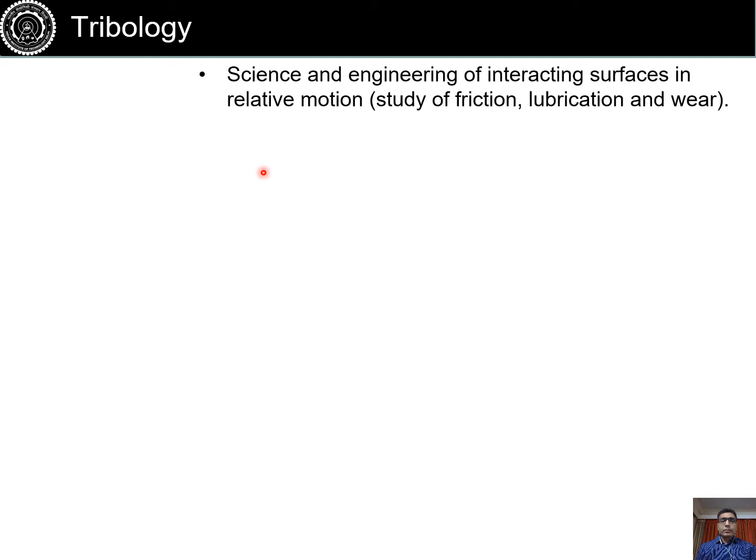Providing lubrication, it can be solid based lubrication or liquid based lubrication, and it's a very important field, and also it spans across all length scales, ranging from understanding natural phenomena such as earthquakes, where friction between tectonic plates gives rise to earthquakes, and engineering machineries.

Automotive engines, hard disks - they all have severe tribological problems which lead to failures, and also it results in energy loss, as well as reliability of the components are affected due to these tribological issues.

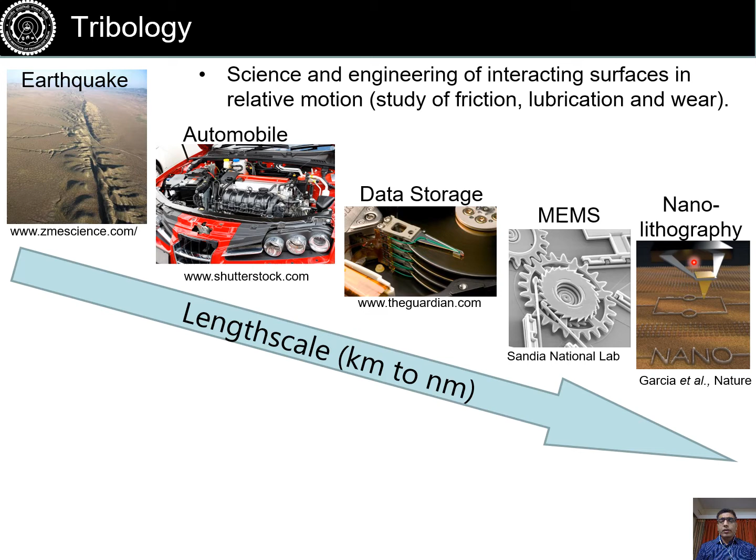Tribology is also going to be important for futuristic devices such as MEMS or nanoscale applications where sliding or interacting surfaces are involved. So it is very important to address and understand the fundamentals of friction, wear, and lubrication in order to improve the safety, efficiency, and reliability of these engineering components.

And in terms of economic losses, if you sum up the total losses every year due to tribological problems, it is quite a significant amount of GDP of any industrialized country, which is lost every year.

And the primary reason why we are not able to minimize these losses further is due to a severe lack of understanding in terms of fundamentals of friction, wear, and lubrication.

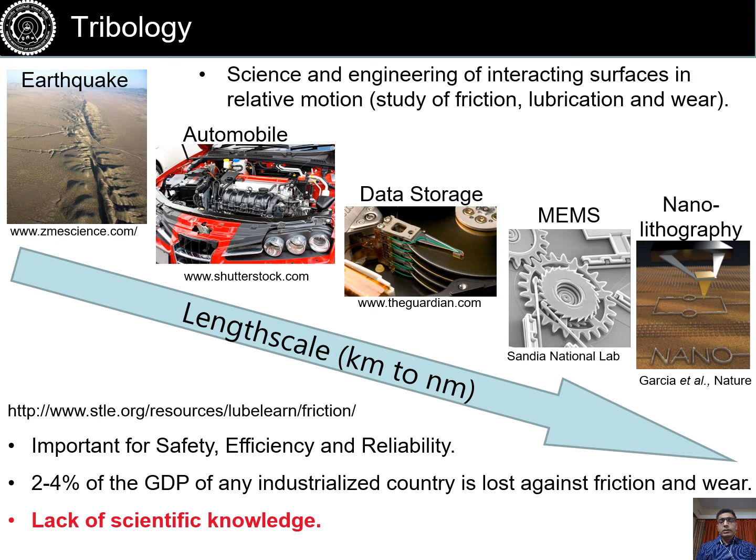So what makes friction, wear, and lubrication hard to understand fundamentally is the complexity of the sliding interface. If you consider two interacting surfaces, the interface where these surfaces touch each other is extremely complex. The surfaces are rough and they have a large number of asperities, and these asperities are of different sizes and shapes.

And when these asperities touch each other, then these surfaces experience friction and wear, and that's where we have to minimize these friction and wear related losses.

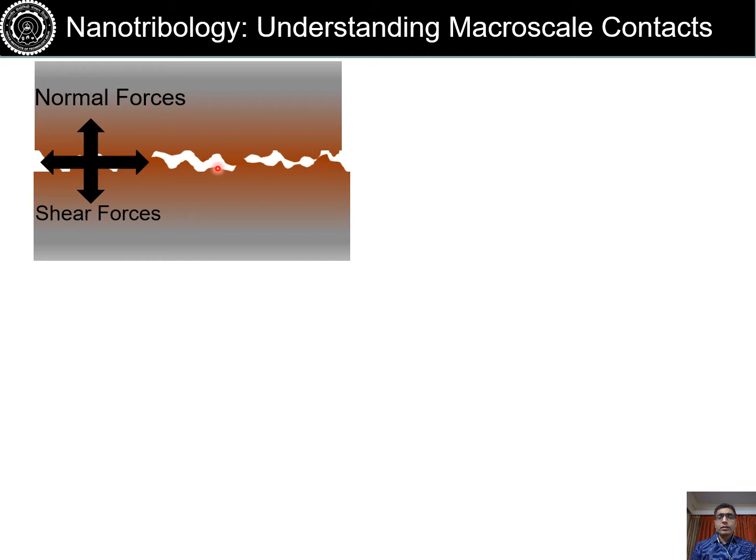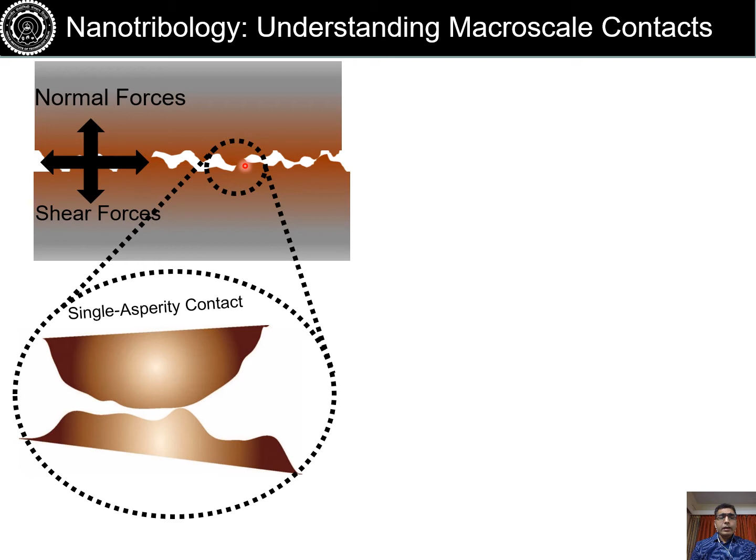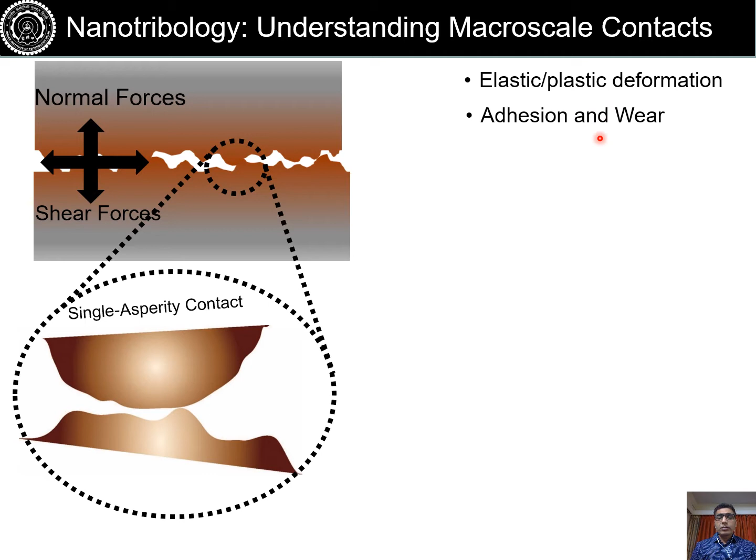And these processes happen because these asperities are directly in contact with each other. And in addition to that, apart from deformation of these asperities, there could be adhesion between these asperities, there could be material wear when shearing happens.

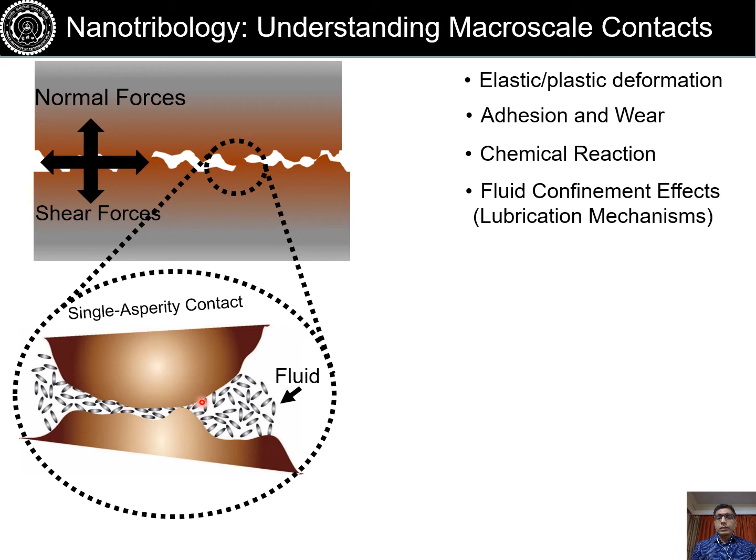And also there could be chemical reactions, particularly in presence of reactive environment, or these surfaces can also bond to each other or weld to each other if they are reactive.

So the question is, how to really understand the fundamentals of these interactions? We need a technique which allows us to look at these asperity level interactions.

And AFM is one such tool which has the potential to address this, because it provides us a very well defined contact where you have a single asperity contacting against a variety of materials which can be studied in this technique.

In a variety of environments, you can use all sorts of lubricants, for example, and these lubricants can have different chemistry, and you can study these sliding interactions under those conditions, and also you can have control over temperature as well.

So the idea of using this technique is to go from an empirical macro scale approach all the way to understanding asperity level interaction, which is the fundamental of these macro scale interactions - the crux lies in the asperity level interactions.

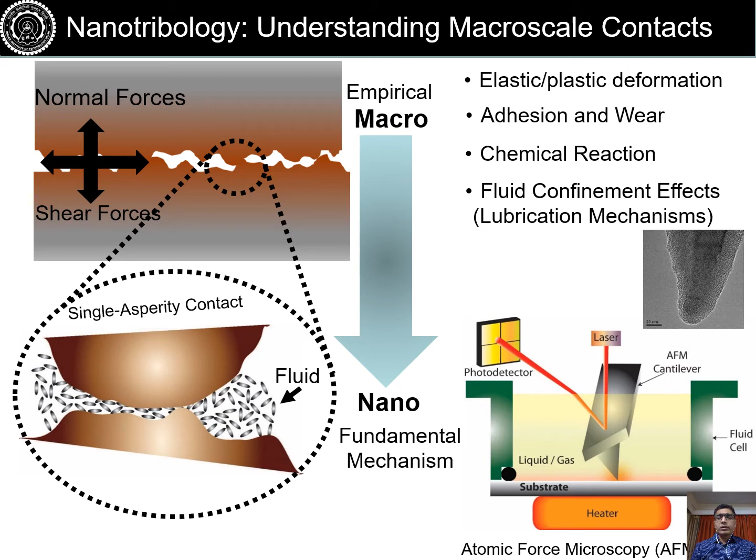So one question we try to address using this technique is studying a lubricant which has an additive used for car engines. Automotive engine oils contain this ZDDP molecule, and this molecule has been studied for decades, but it's not fully understood how it works, how it reduces wear between the sliding components.

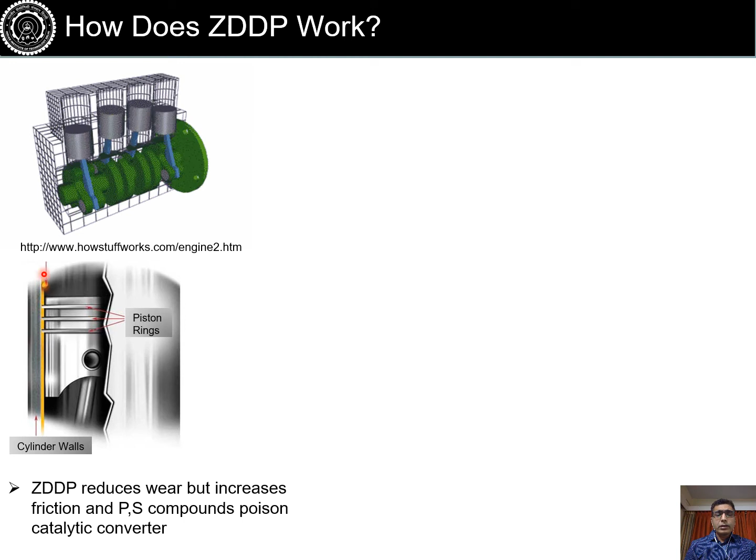It is well understood that when this molecule is added to the lubricant, it goes to the sliding interface with the lubricant, and that results in reaction of this molecule at the interface. What has been observed is that at the sliding interface, a tightly bound layer is seen, which protects the surfaces. So it acts as a protective layer.

What has been hypothesized is that due to high contact pressure at these small sharp asperities touching each other, at elevated temperatures, and due to shear, some kind of reaction happens in presence of these molecules which results in these films. But there's no direct evidence of how these films grow and what parameters govern the growth of these films, because of the complexity of these macro scale interfaces, which has been very difficult to interpret in terms of understanding the local interactions.

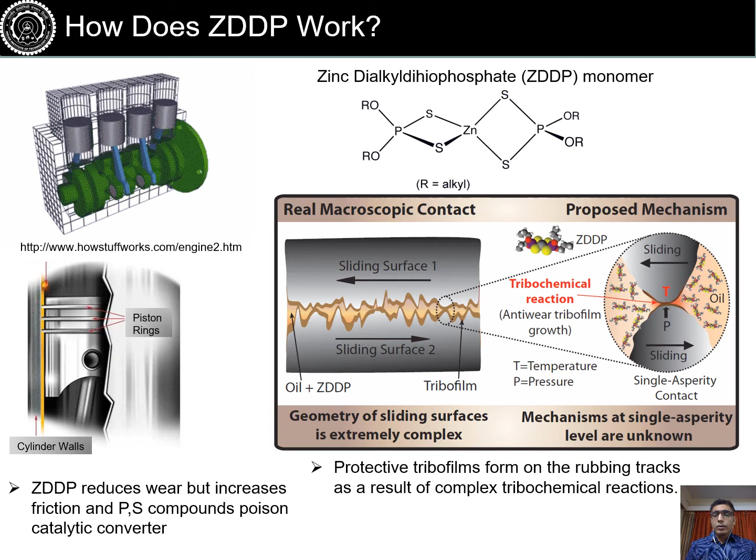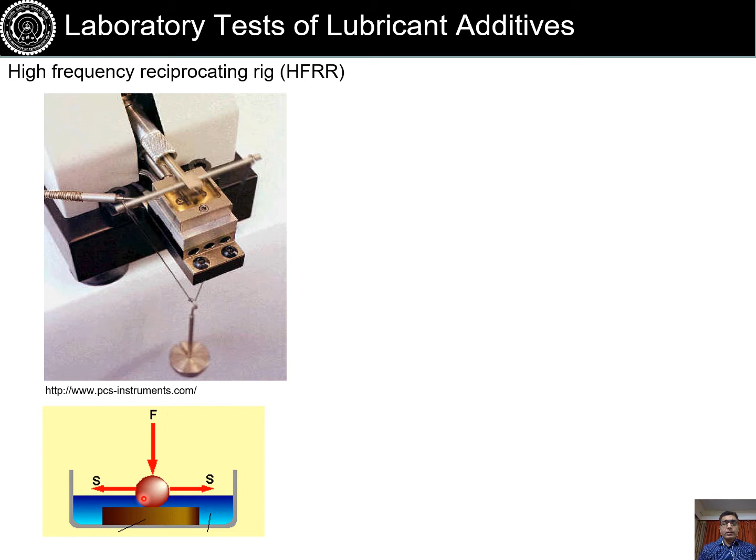So what typically people do to look at these lubricants' interaction with metal surfaces is use tribometer tests, where they can use a metallic ball against a metallic surface. What they have observed is that whenever ZDDP is added to the lubricant, a film starts to develop in presence of ZDDP. As time progresses, this film becomes more dense and thicker, and that results in anti-wear properties, because now metal-metal contact is prevented due to formation of this protective layer.

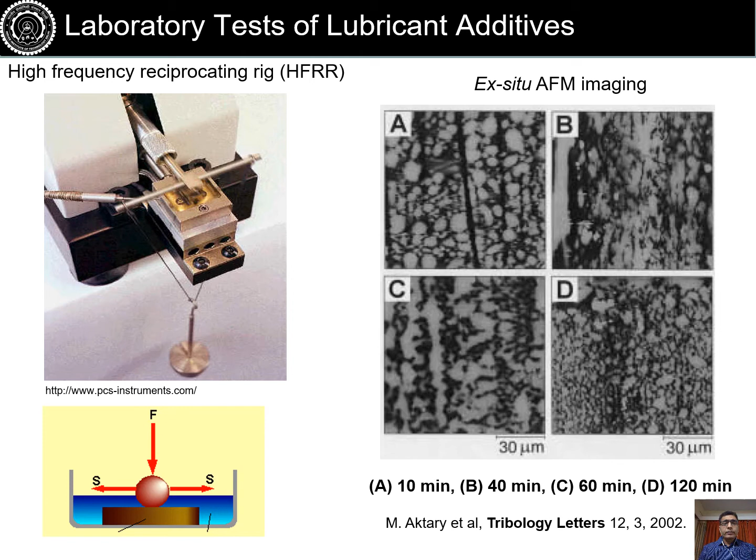But so far there was no evidence of how these films form, exactly what parameters are important for the growth of this film. So we took up this approach based on AFM in liquids, and we conducted an in situ experiment.

As I've shown this picture earlier, we have an AFM based setup which has a fluid cell where we can use a lubricant and ZDDP in 1 weight percent standard concentration, which has been used in macroscale experiments. We can use a steel substrate or iron coated silicon surface, which was initially used in our experiments, but later on we moved on to steel as well.

We used a silicon cantilever which is coated with diamond-like carbon to provide high wear resistance to the sharp tip, otherwise it will wear very quickly under high contact pressures. Then we did experiments at a variety of forces, variety of temperatures, to look at what happens in this kind of environment. So here is the schematic of the experiment.

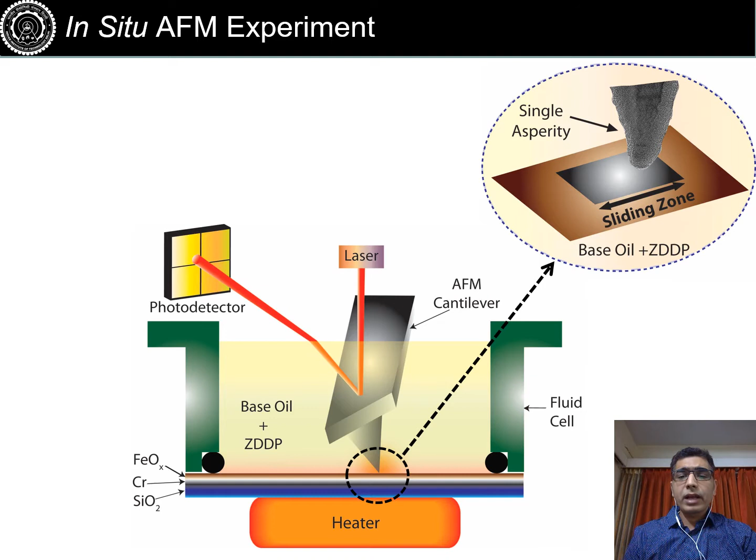So we select a very small region of interest on the sample surface, and we slide the tip at different loads, which will vary the contact pressure between the tip and the sample. Then we do these experiments with different temperatures at different length scales in terms of sliding time, and monitor what happens to the surface.

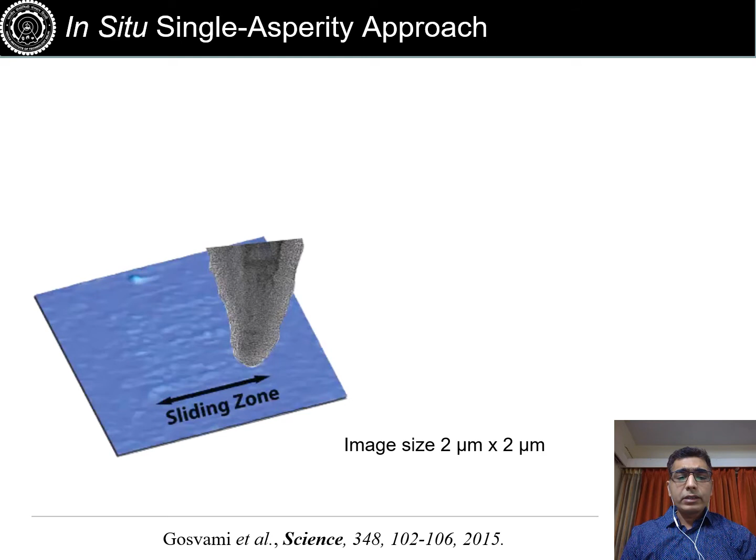And we were successful in conducting an experiment where we found out a condition where at certain critical pressure we saw that when sliding happens above certain critical values, the film starts to develop.

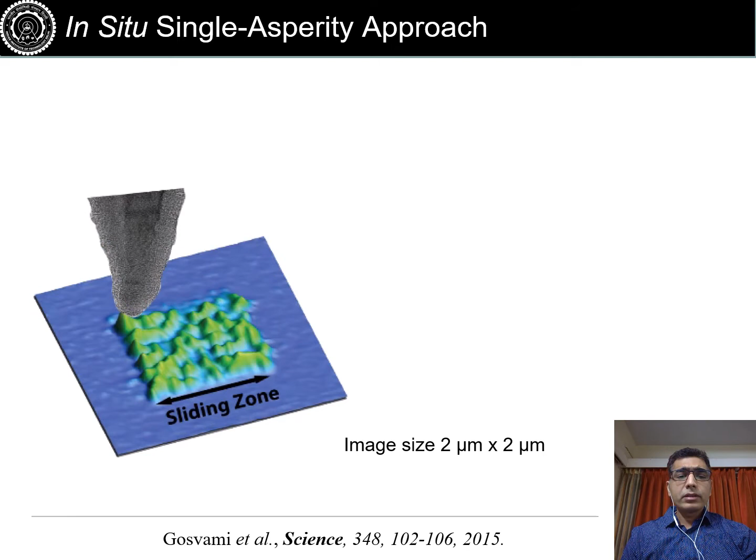And then we image this film by applying low pressure and take a larger area image so that we don't form the film outside this region of interest. As you can see, we have stitched several images together to show you how the film growth is progressing with sliding time, only in the region where high contact pressure was applied.

So it's a highly controlled experiment performed at a very localized region of the sample, and we first time very clearly showed that this film develops only in a region where pressure above certain critical value was applied.

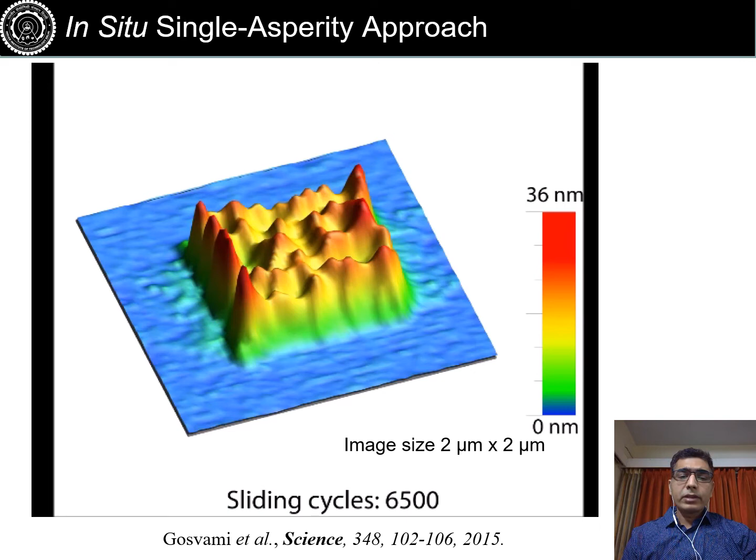Then we did a very systematic study as a function of contact force, which will vary the contact pressure. In terms of increasing pressure, we saw that film growth for a given sliding time is thicker for higher contact pressure. So as the pressure is increasing, film thickness is also increasing for a fixed sliding time. And of course you start to see wear or deformation of the film when the pressure becomes too large.

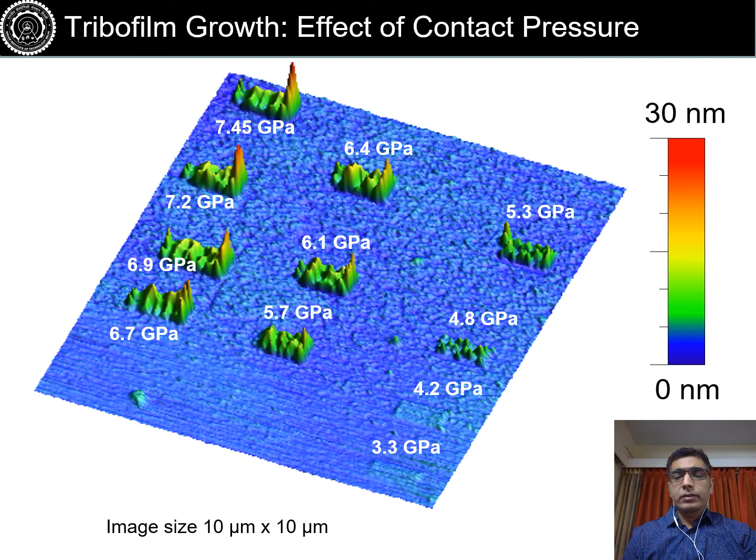So in order to understand how this pressure is affecting the reaction, and another parameter is the temperature, we saw that this reaction did not happen at room temperature. So how to take into account these parameters? We try to analyze it in terms of a simple chemical reaction.

It's a single barrier Arrhenius type reaction rate theory. So we assume that the growth rate of the film is exponentially dependent on temperature based on this Arrhenius reaction rate theory.

But we saw clear evidence of stress applied at the tip-sample contact, so we have to take into account stress or contact pressure as well. The idea behind how we can incorporate stress in this equation is by assuming that the energy barrier is reduced as stress increases, which is evident in our experiment when we increase contact pressure and see the reaction happening at a faster rate. So this is a very simple model we used where we took into account the stress multiplied by activation volume,

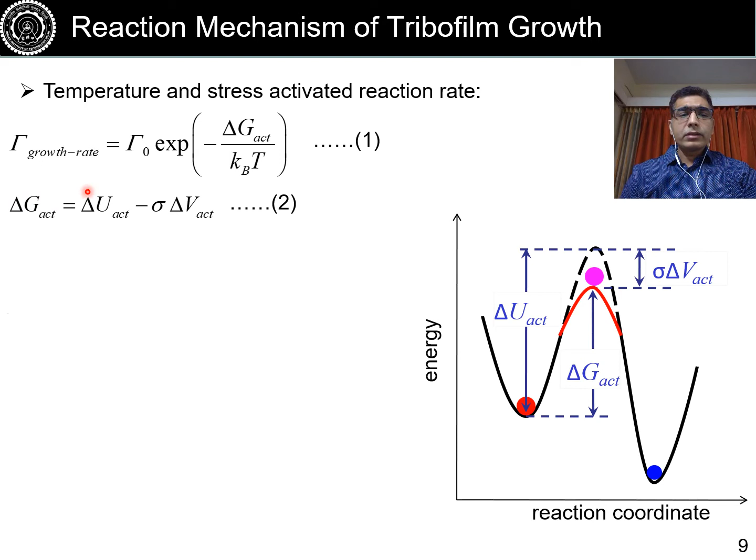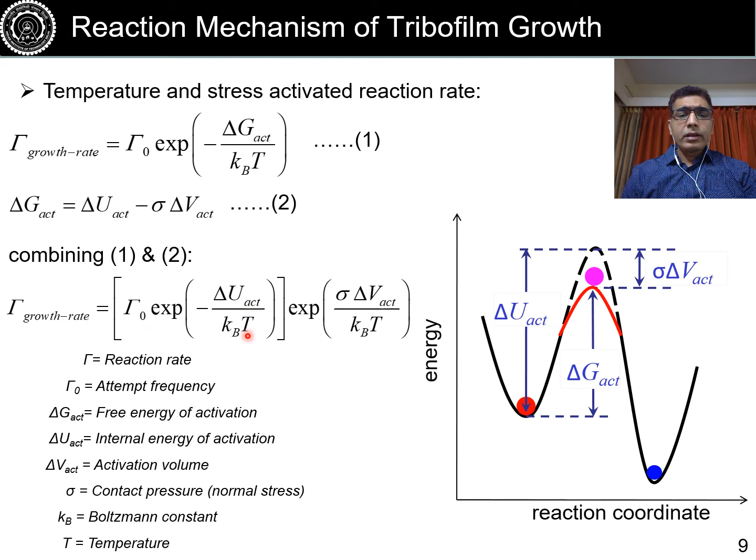which is the reduction in energy barrier due to application of stress. So we modify this equation by taking into account the stress or contact pressure multiplied by activation volume, which will reduce the energy barrier. So this equation converts into a final equation where we have temperature as well as stress taken into account.

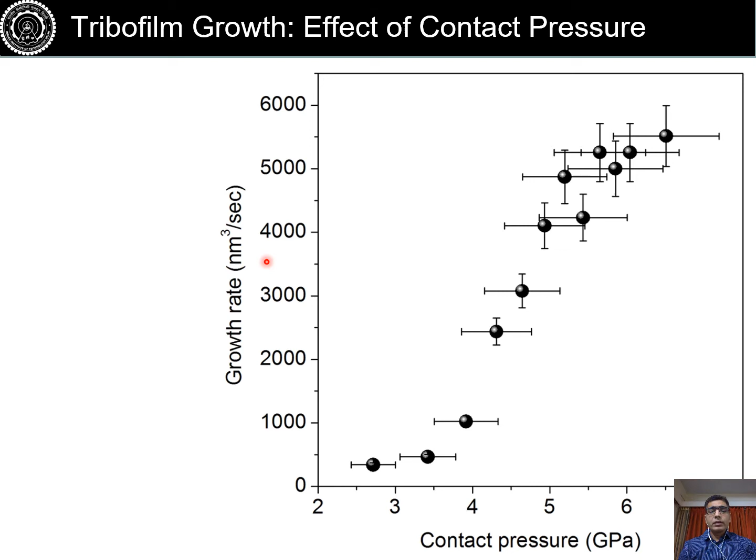So then we did a systematic study where we varied the contact pressure and looked at the growth rate of the film in terms of volume of film growth observed per unit time. And we see a very nice fit to the data up to a certain value of stress.

So we see that at very low stress or contact pressure values, the growth rate is very small, and it exponentially increases with increase in contact pressure.

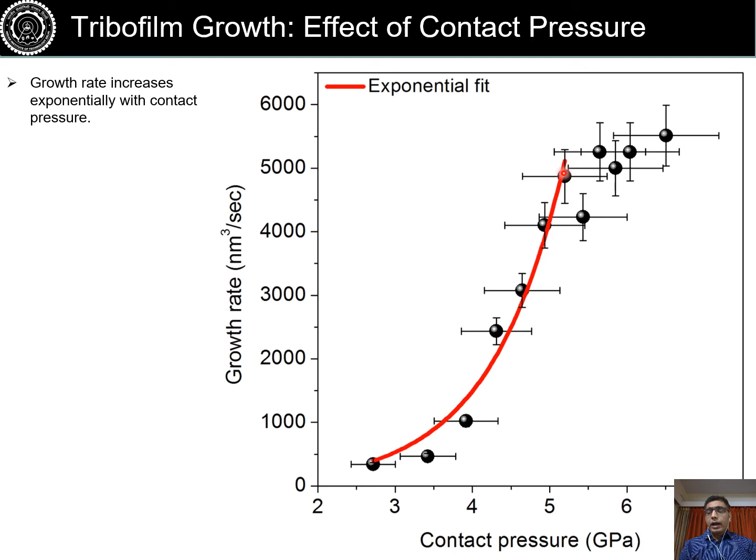But what happens beyond this point is that this model doesn't fit, and the reason for that was clear to us when we looked at the AFM images of these films. We saw that in the region where the data fits well to this equation, the film is not damaged or wearing away. So whatever reaction is happening, the film is building up, getting thicker and thicker.

But after that, the film thickness became almost constant, or the growth rate saturated. This is evident in the image -- if you look at this image at higher stress, you see the film has deformed quite significantly. You can see some kind of shearing of the film has happened. So significant wear of the film starts and then the growth rate saturates.

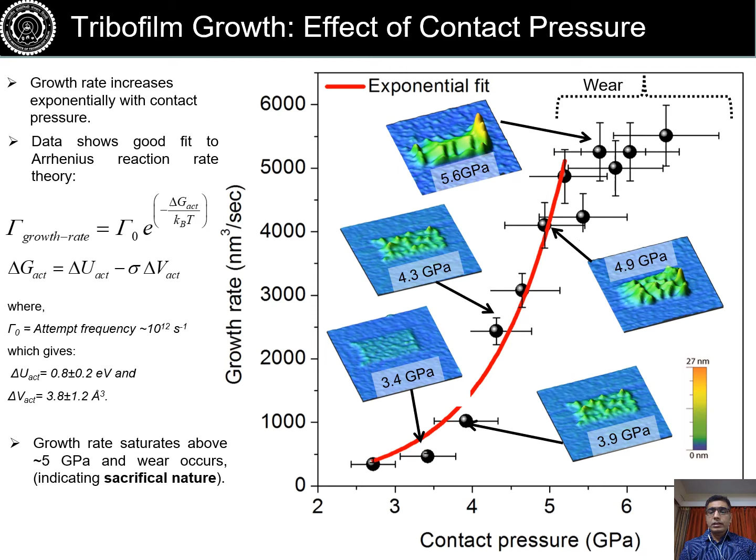So we managed to get some reasonable numbers from this. The activation volume came out to be of the order of atomic dimension size, and the energy barrier also indicates some kind of chemical bonding happening between this molecule and the substrate. So of course it's not telling us exactly what reaction is happening, but it's providing clear evidence that it's an activated reaction which is assisted by contact pressure or stress applied.

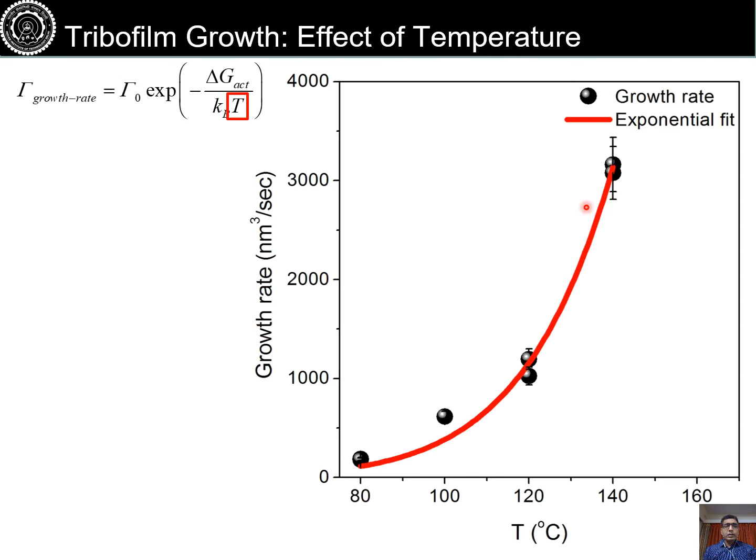So in order to further confirm this activated model, we did a separate experiment where we maintained the stress as constant and varied only the temperature. In that situation, we again got data which showed that the growth rate is increasing with temperature in an exponential manner, and the fit looks reasonably good. We got very similar values of energy barrier, which suggests that by doing independent stress variation and temperature variation experiments, we confirm that

it can be described as a chemical reaction which is driven by stress and temperature.

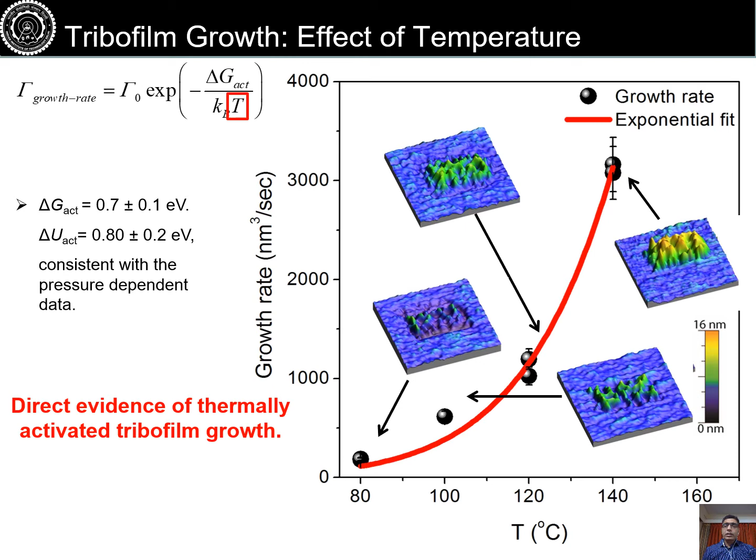So this was the first time the ZDDP molecule, which is actually an automotive lubricant additive, has been studied at this length scale, and that was possible because of the availability of tools such as an AFM which can work in those kinds of environments. So this was very encouraging and it opened up a lot of new avenues for us to look at molecules or lubricant additives which are relevant for macro scale tribological applications.

So we of course confirmed the formation of this film and showed that chemically this film is derived from ZDDP, because we have the elements which are present in this molecule -- phosphorus, sulfur and zinc -- and that confirms that this chemical reaction has happened in the region where sliding has taken place.

So of course, several questions were asked when we did this work: how is this relevant for multi-asperity contact where you have a more complex interface? Will it be identical in those situations, or how do we translate our results to higher length scales in terms of larger contact size? And also, our tip was diamond coated silicon, so how do we relate this to steel-on-steel contact, for example?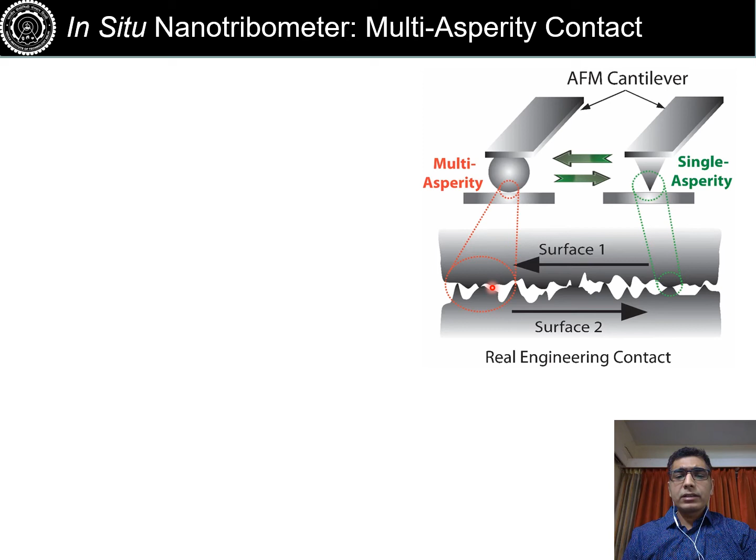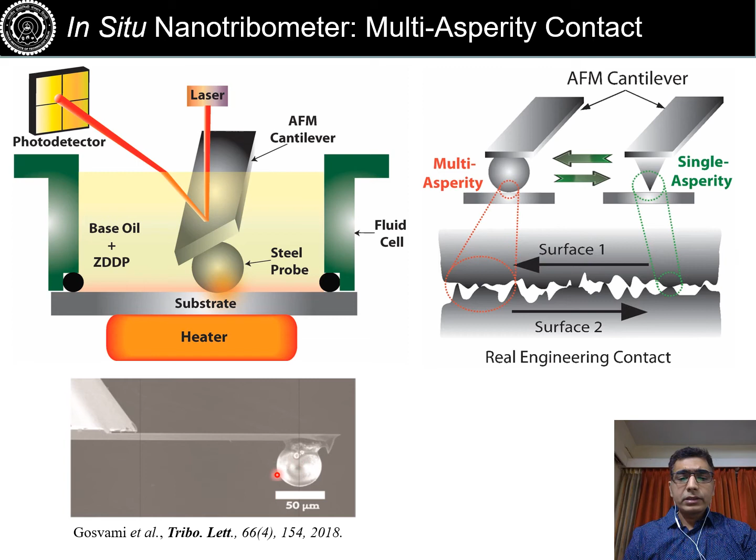So we generated some kind of microscopic multi-asperity contact to visualize how this reaction is going to change when you have such a difference in contact geometry. And we did an experiment on a steel substrate, so steel on steel in the same lubricant. This is an SEM image of one such steel microsphere attached cantilever.

So we found that when we did sliding, we could simultaneously record the image of the sliding interface, and this is a polished surface. You can see the polishing marks, and you can see that film is growing preferentially on the sharp scratch on the surface because of stress concentrations, and film is growing non-uniformly, forming island-like patchy topography, which we have seen previously in the single asperity experiment.

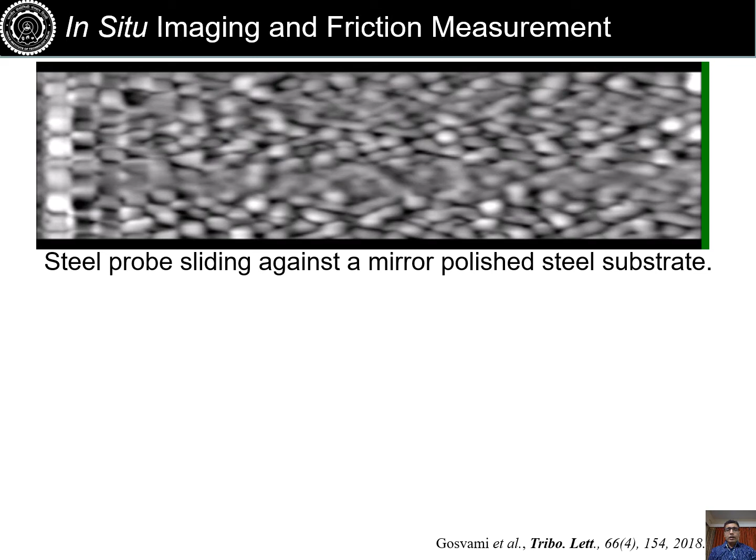And we found that, similar to the single asperity experiment, this film has formed only at elevated temperatures. One more advantage of using this microsphere against a flat surface was...

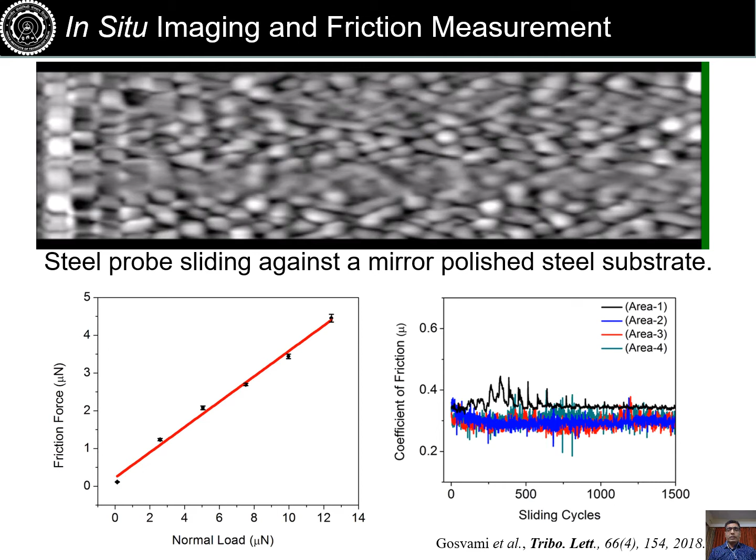So the major advantage is that you can also have a variety of probe materials which can be used in the form of microspheres attached to the commercial AFM cantilevers, and then you can study a variety of tribo pairs.

So we found that the film growth appeared to be very similar to what we have seen in single asperity contact. Film growth happens, and of course if we press harder, we see that film growth is faster, and also it happens particularly faster at elevated temperature.

So we could manage to do experiments in very controlled conditions with very controlled geometry, which allows us to understand in a better way how these molecules are reacting at the sliding interface. In a multi-phase system, it can become very important because you want to see how these local reactions are happening if you have heterogeneity on the surface and so on, which I will demonstrate as well.

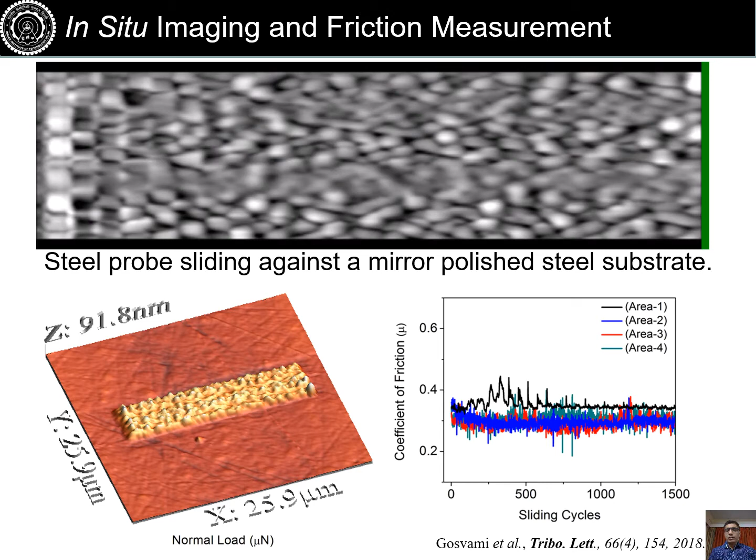So in terms of heterogeneity and looking at more realistic systems, we have started doing experiments on different alloys. One such example is aluminum silicon alloys, which is heavily used in automotive engine block manufacturing. This alloy primarily has two phases: aluminum matrix, which is the light color region, and silicon phase. Of course it has some iron-rich intermetallics as well, but those are not a significant fraction of the microstructure.

Majority is silicon phase, as well as the aluminum matrix, which is very soft aluminum region around hard silicon particles. So my student Prashant looked at interaction of ZDDP on these surfaces, and we looked at how these films develop on different regions of the surface, which has silicon and aluminum matrix.

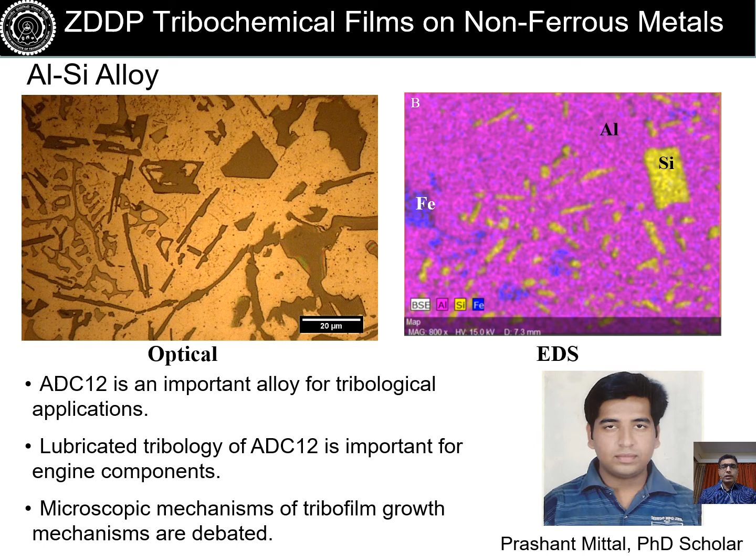So before I share the results, I will show what people have seen on these alloys in terms of formation of these films. It has been observed in macro scale experiments that mostly silicon phase is where the tribofilm develops, and ZDDP forms a nice thick protective layer on silicon phase, but the aluminum matrix doesn't seem to support these films. But the reason is not very clear because of the complexity of the macro scale sliding interface.

A lot of wear is generated in macro scale experiments, then there is a lot of mechanical mixing, so a lot of damage happens to the interface, which makes it hard to interpret the results. There's another set of results which shows a similar observation, that silicon is where tribofilms are developing, whereas there is no tribofilm on the aluminum matrix, which is the softer region around silicon.

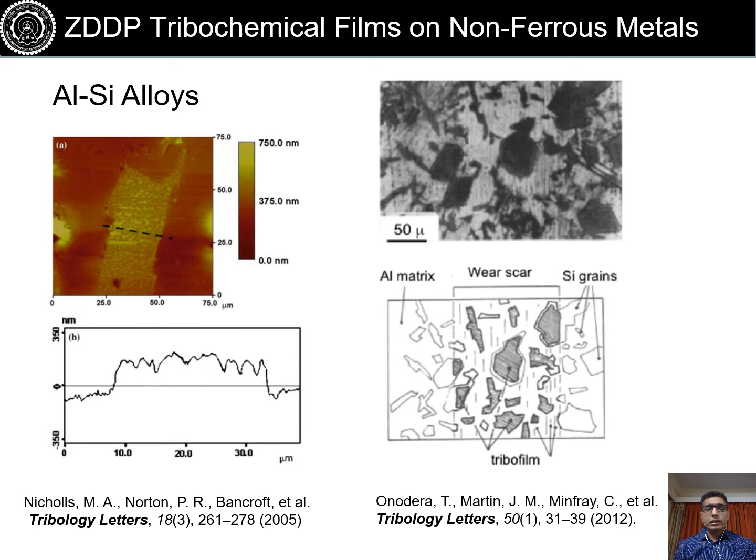So we did this experiment in a more controlled manner, where we selected a region of silicon and aluminum matrix around it and did a simultaneous sliding. When we do simultaneous sliding, we were actually puzzled to see a contradictory result, where we see tribofilm developing on both aluminum as well as silicon phase.

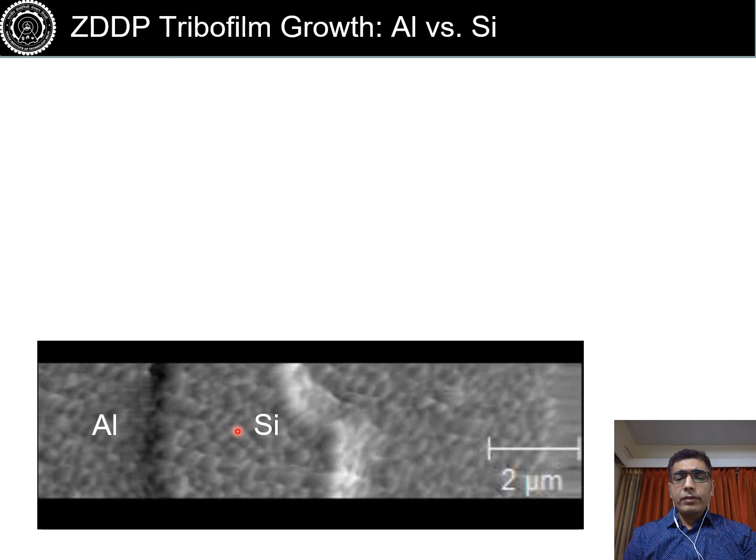Then we analyzed these tribofilms in more detail, and here is the final AFM image. So this is the silicon phase on which tribofilm has developed. You can see the islands of the tribofilm, and the aluminum matrix around it also has these films.

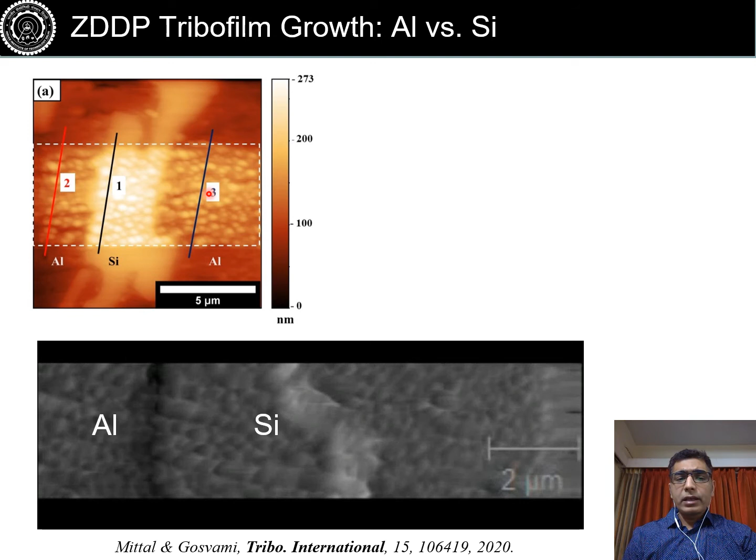But there was a clear difference when we look at the topography and height of these tribofilms. We saw that tribofilms were thicker on silicon, around 70 nanometers, with respect to aluminum, where they were around 40 to 50 nanometers. Also the roughness of the tribofilm on silicon phase is very different compared to aluminum, where you see more gap between the islands of the tribofilm, so it's more patchy compared to silicon, where there's a more dense film.

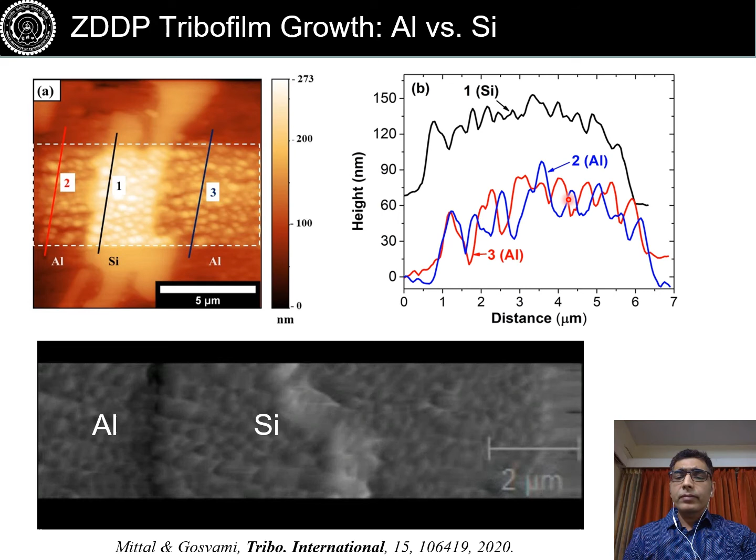We can relate this to the stresses because silicon is a much harder phase compared to aluminum. So the contact pressure for a given load at which we are sliding will be much higher on silicon. That results in a faster rate of reaction, which grows a thicker film.

We could also chemically characterize this film by looking at the elements present, and we see higher concentration of phosphorus and sulfur where the film is forming on silicon. Of course, it's a denser and thicker film, so that is expected.

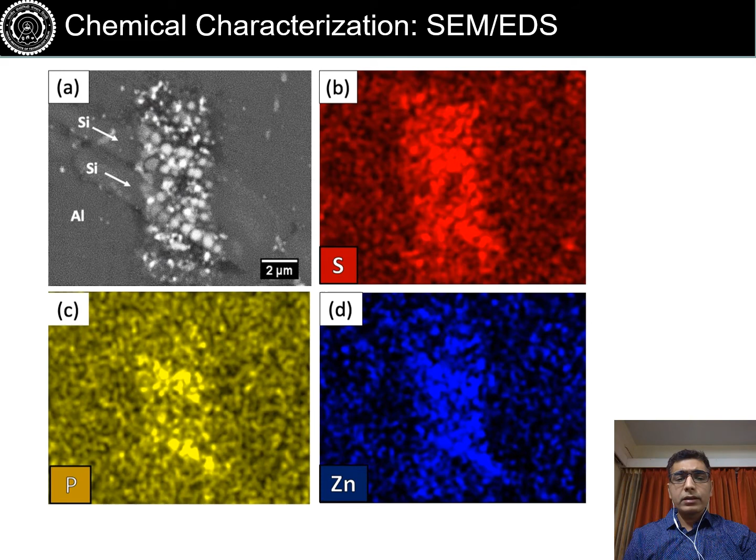Another interesting observation was when sliding far away from the silicon, purely in the aluminum matrix, we see that the film did not develop. We see continuous wear of aluminum instead. So we thought it could be due to silicon somehow affecting the mechanical property of the neighboring aluminum matrix with respect to a region away from the precipitate.

But we did nanoindentation and see that there's not much mechanical property variation in the aluminum matrix closer to the precipitate or away from it. So it has to do with something else, which can be related to small chemical changes in the substrate, but we have not yet fully resolved that, and we are still working on it.

We also see that friction coefficient can now be measured because we are using a microspherical probe, a ball-and-disc kind of tribometer setup, which we started using by attaching a microsphere to the AFM cantilever. These friction coefficients also correlate very well with our friction and wear observations.

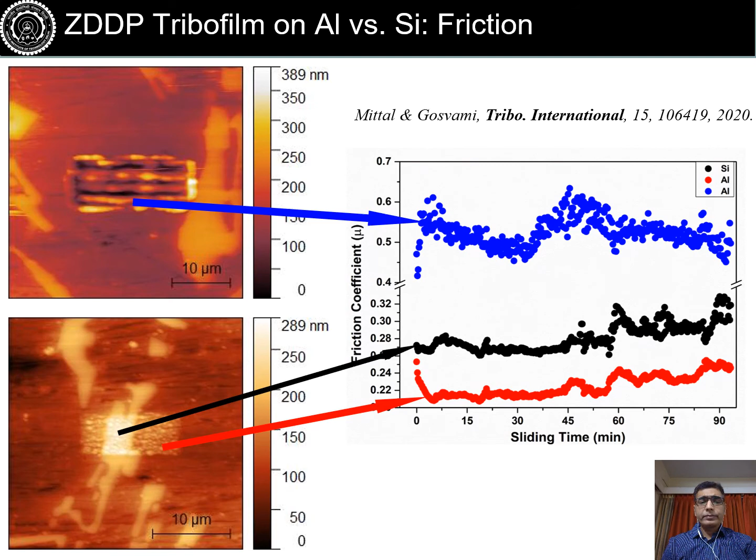Apart from aluminum alloys, we are also interested in magnesium alloys. My student Deepak has done some work on how these reactions happen on magnesium alloy surfaces, specifically AZ91 magnesium aluminum zinc alloy. In this alloy, we have either a cast version with large precipitates, or we can age-harden these alloys to improve their mechanical properties, but age hardening results in finer precipitates.

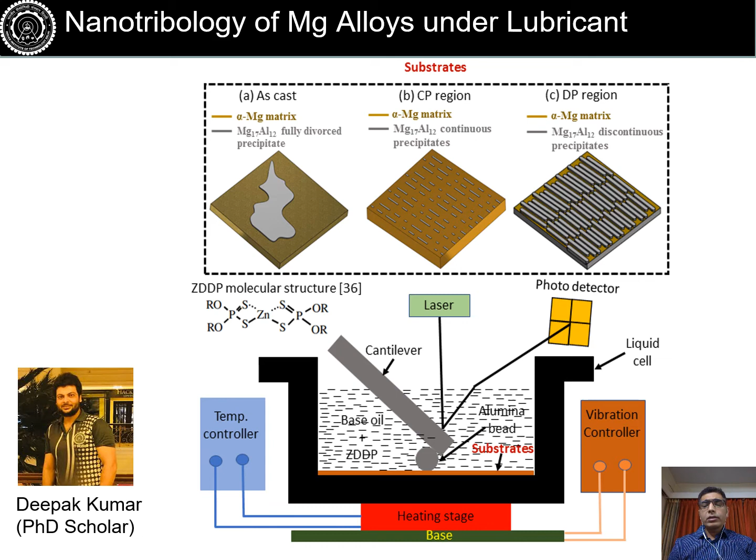How the microstructure affects film growth was investigated in this work, and we found that ZDDP forms a very nice tribofilm on large precipitates. This is a flat surface of a large precipitate, Mg17Al12, and around 40-50 nanometer thick film has been observed.

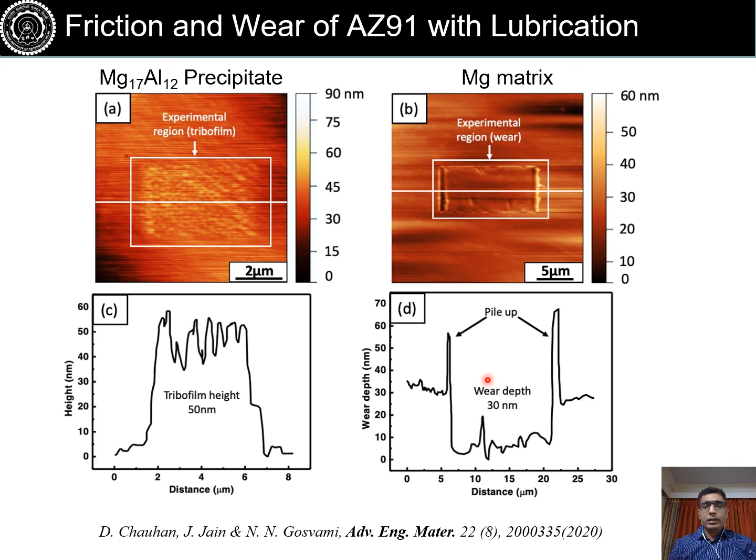Whereas magnesium does not support tribofilm formation, and we always see wear of the magnesium matrix. So ZDDP is a very poor anti-wear additive for magnesium alloys because we could never see ZDDP forming a film on magnesium, either close to the precipitate or away from it. We always see wear of the magnesium matrix.

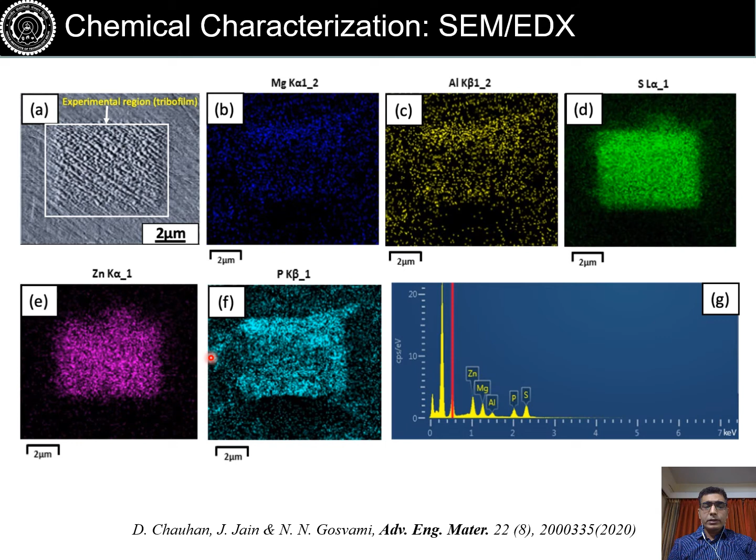On the precipitate, we characterized the film and confirmed that it comes from ZDDP-derived species due to the presence of zinc, phosphorus, and sulfur. Whereas on the matrix, we didn't see any such signals.

Then we conducted an experiment on the fine precipitate, which is the age-hardened alloy, and to our surprise, we could not see any film developed on this surface, where the wear is also very small. So despite wear not happening to that extent, the fine precipitates do not wear easily in an AFM sliding experiment.

Both types of fine precipitate did not show any tribofilm, and we believe the reason is the corrugation of the surface due to these precipitates. If you see, the surface is highly corrugated, and if the probe is sliding over such sharp features, there will be large stress variation and also stress concentration.

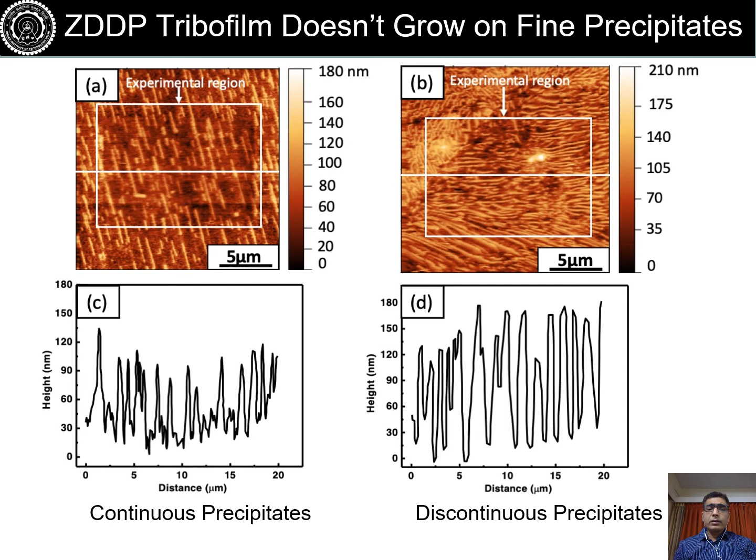We have seen in the previous first experiment where I showed wear of tribofilm at elevated stresses - that is probably what is happening here: these stress concentrations and stress variations are not allowing tribofilm to develop on the surface, and this corrugated surface prevents smooth or stable sliding of the probe, which is required for shear of these molecules so that they can react at the interface.

We also saw some interesting wear behavior of these fine precipitate containing regions. We tracked wear around a single precipitate, and we see that the precipitate does not wear as a function of load - we did sliding tests at different loads, continuously sliding and then changing the load and sliding again. So in multiple sliding experiments conducted in a single region, we see that the precipitate has not worn at all, whereas the matrix is continuously getting worn out as a function of time.

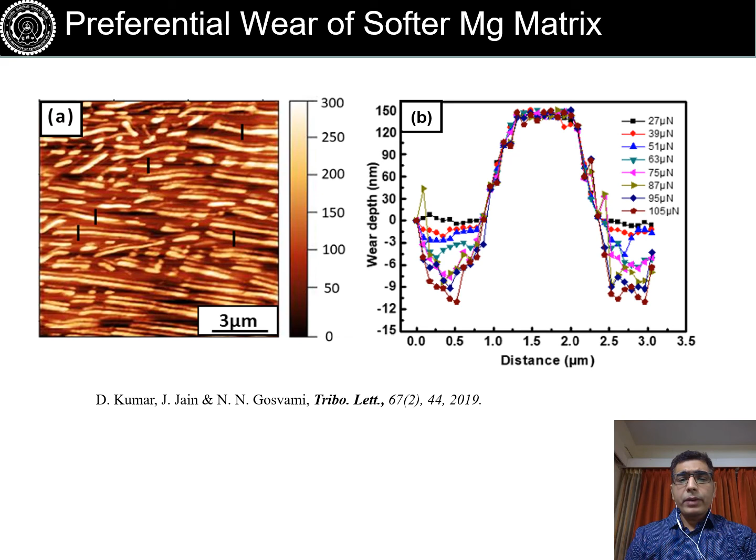So some wear is happening despite these precipitates not wearing at all, and this has a bearing on friction values. If you see the friction force data as a function of sliding time: in the fine precipitate regions, there is very gradual wear of the matrix around it, but pure matrix of magnesium wears completely, so friction is maximum there. On the large precipitate, where there's anti-wear film forming and no wear at all because there's no softer matrix that preferentially wears, we see the friction is very low.

ZDDP film growth as a function of time shows a very interesting feature on this large precipitate, where we see a quite strong dip in the friction, followed by, as the film thickens, friction increases and then levels off, and then there's some fluctuation, which we have not seen on ferrous substrate or aluminum substrate - it was unique to these magnesium alloys.

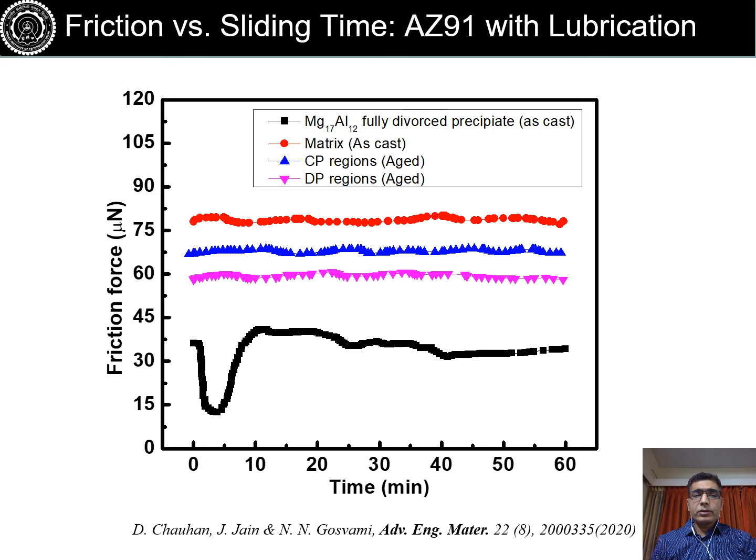Another study we conducted on magnesium alloy - since we found that ZDDP is not an effective anti-wear additive, we found in literature that macro scale studies have reported amide based molecules reacting well with magnesium and forming some kind of protective layer. But a detailed study at local microstructure or microscopic length scale had not been carried out.

So we took up this AFM based approach, and again looked at the purely magnesium matrix in an as-cast alloy. We can clearly see that a film has developed on the magnesium alloy matrix, which is much softer and was wearing in case of ZDDP containing lubricant. But here we see acrylamide has formed a nice tribofilm, only a few nanometers thick, much thinner than ZDDP films on the precipitate region. But with ZDDP, no film develops on the matrix.

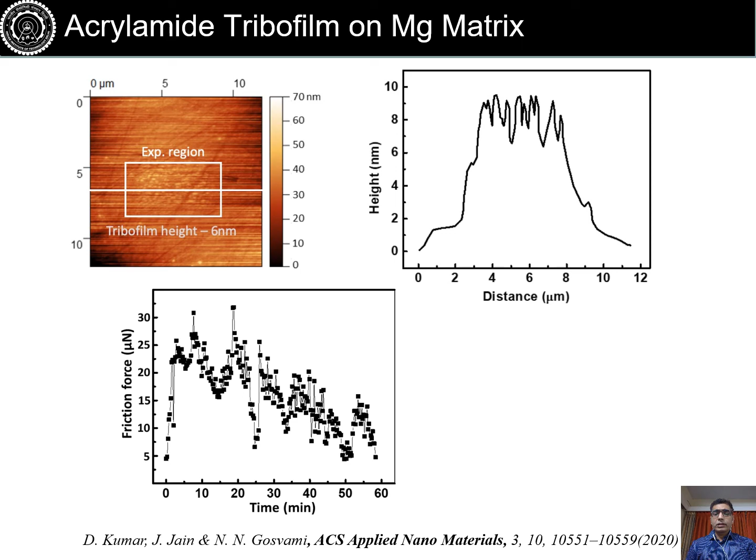Acrylamide based additive also showed very nice friction force variation with sliding time. As the film develops, friction increases quite sharply, but then as the film becomes thicker, the friction continuously drops, which is good because as the film gets thicker, friction reduces, so overall frictional losses will also reduce with sliding time. On the large precipitate, we saw the film is much thicker, and again we can see that the harder phase gives rise to a thicker film - stress always helps increase the reaction rate.

As the film is thicker, we see a sharper rise in friction and higher friction than with a thinner film, then a sharper decrease in friction with sliding time. So compared to ZDDP, acrylamide shows just the opposite behavior - friction increases and then drops, whereas with ZDDP, friction first drops on the precipitate, then increases, and hovers around some value. But this ZDDP behavior is not seen on the matrix or fine precipitate region, whereas acrylamide shows this behavior on the matrix as well as on the large precipitates, which makes it a very important additive for magnesium based alloys.

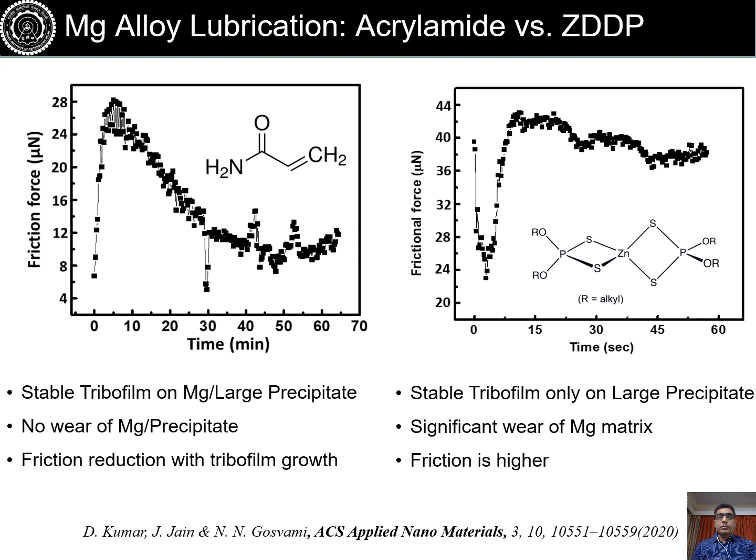AFM allows us to systematically study these differences between two different types of additives in very localized regions. We also did this study on a fine precipitate region, and we see that acrylamide does not form a tribofilm there, which suggests that these fine precipitates are not good for lubricated systems where tribofilms are desired. So some microstructure tuning is required to get the right precipitate size, which does not give poor mechanical properties but also supports tribofilm growth.

Now I will divert a bit and talk about another direction which we adopted from this kind of work, where we are looking at sliding induced changes at the interface, looking at chemical reactions, and now we can utilize that for making patterns on the surface, which we call nanoscale triboprinting. Some of the results are shown here.

This work was done in collaboration with Professor Harman Khare, who is now at University of Gonzaga. We looked at how these reactions can be controlled, and how well we can control them in a way to pattern the surface, which can have a variety of applications for making channels or making devices.

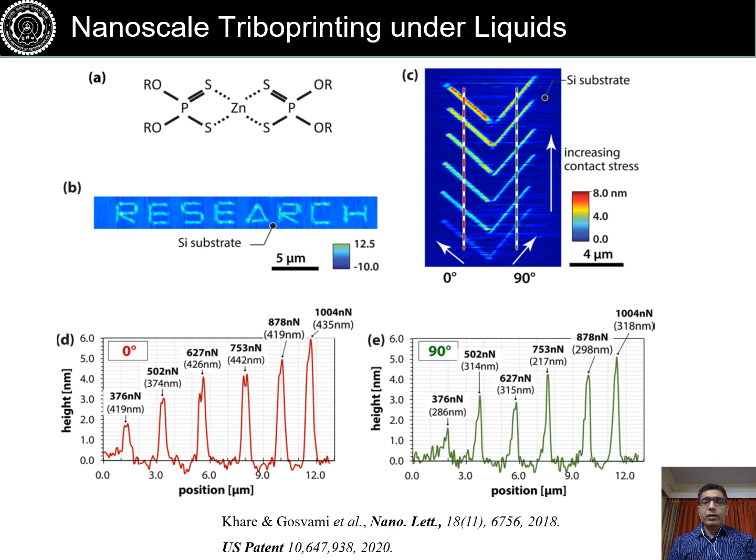We also see some asymmetry in the pattern as we slide at different angles, because of the asymmetry of the contact itself. If the contact is symmetric, you get a symmetric pattern; otherwise the contact shape will also affect the size and shape of the pattern.

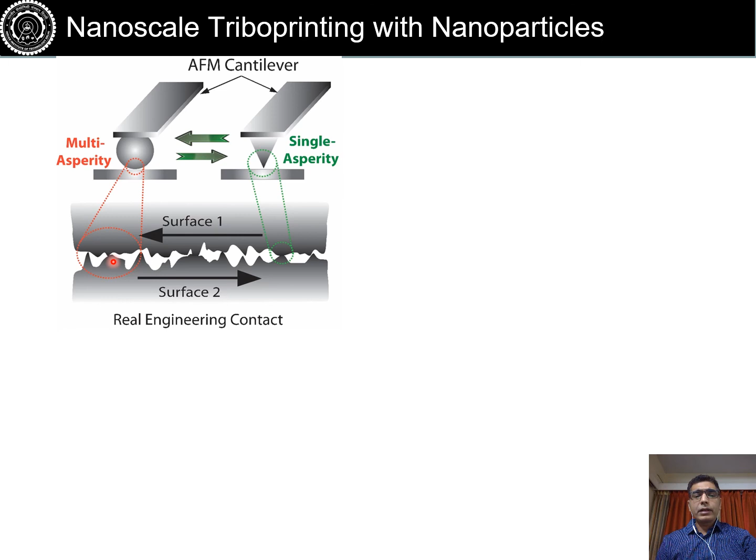Then we try to extend this to other species such as nanoparticles, and we realize that with a single asperity it's very hard to deposit or trap nanoparticles at the interface, because nanoparticles are of the same size as the contact of a sharp tip. So we took the approach of using a microsphere, which gives a large contact area, and if you have few nanometer size particles, you can easily trap multiple nanoparticles and write patterns, which is exactly what we did.

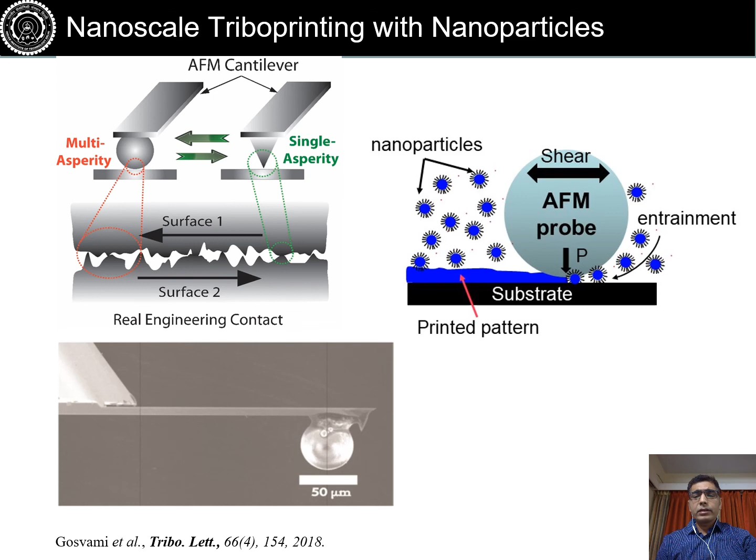This is one such cantilever used in this work. The idea is to trap multiple nanoparticles, and then under high contact pressure and shear you can deposit certain patterns. This work was done in collaboration with Pixeligent, using zirconia nanoparticles.

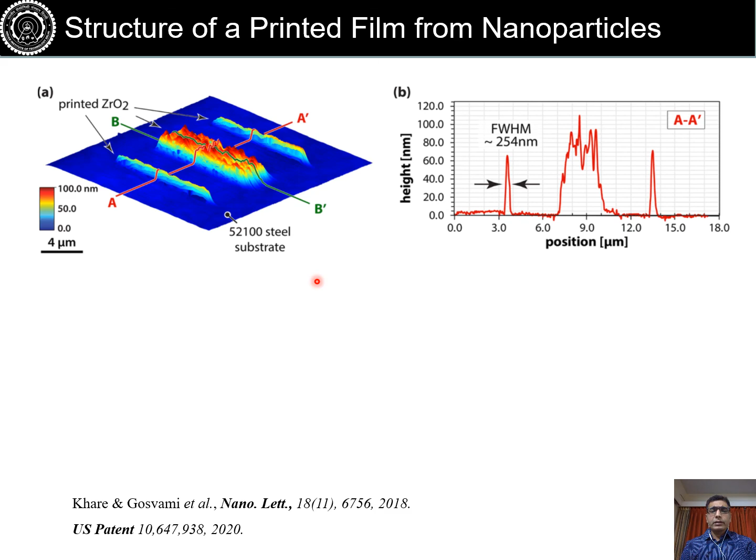Here we see that we wrote line patterns, we drew rectangular patterns, and we characterized these patterns and found that they are extremely robust.

In the chemical characterization, we could not even find the capping agent used for dispersion of these particles, so it has sheared off due to these high stress conditions.

We also did nano indentation and other mechanical property measurements, and found that this film is very robust, with mechanical properties close to that of bulk zirconia.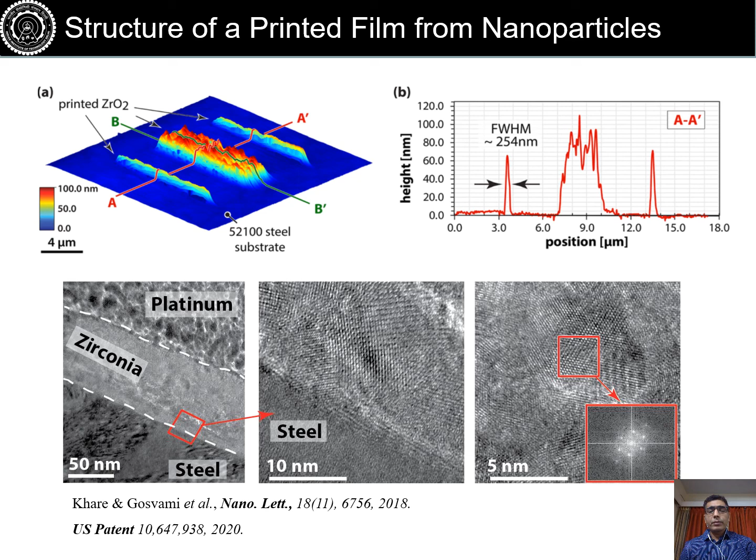We also tried mixing these nanoparticles with molecular reactive molecules such as ZDDP. So we can do either layer by layer patterning, or a composite coating where we mix nanoparticles and reactive molecules together and co-deposit these structures. So all sorts of patterning is possible using this technique.

Using this technique, we now have the ability to control nanoscale chemical reactions in a very controlled manner, in a well-defined region of interest. And now we are going to try to look for applications for these kinds of coatings.

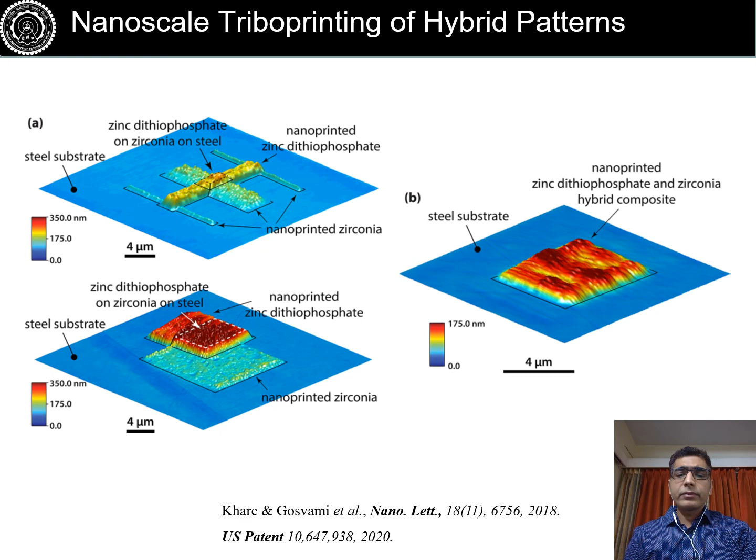In conclusion, I have demonstrated an AFM based approach for liquid experiments, where sliding of the probe can trigger chemical reactions, which can be monitored in situ. We can systematically look at the role of various parameters such as contact pressure or temperature, and use these reactions to make novel structures, nanostructures or patterns, which can be utilized for a variety of applications.